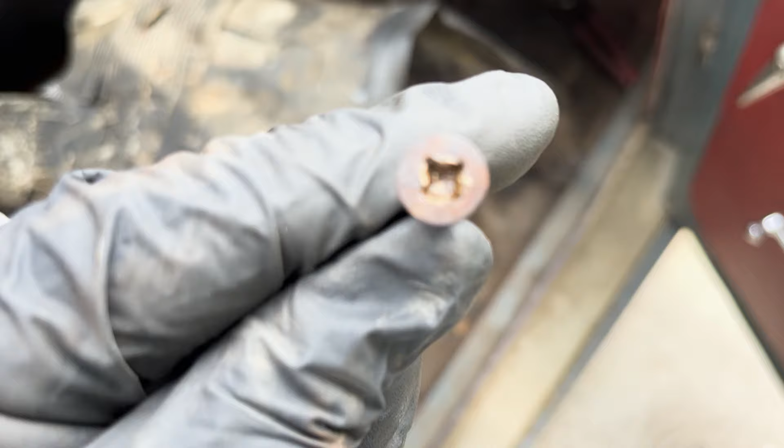Once the rubber flooring was up, that transmission cover is held on by brass screws. Somehow I managed to get all but one out without stripping the heads off. And the last one, I managed to fit a flat-headed screwdriver into the Phillips head.

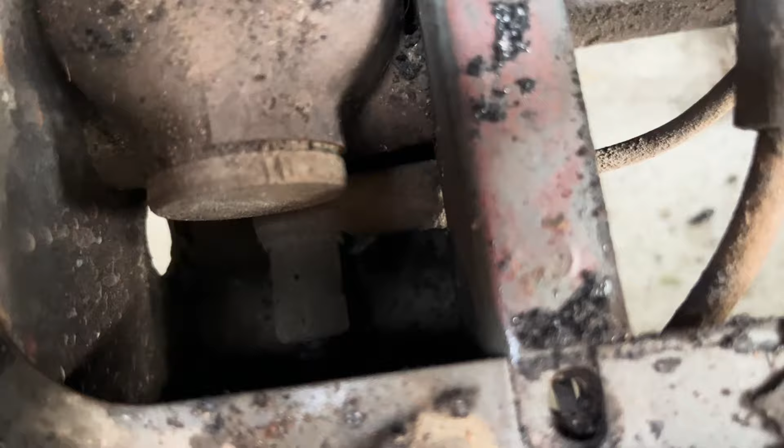The brake master, immediately obvious that it was going to be a bear to get this thing out. It's in the floor in this tiny little opening. The clevis pin and the spring and all the parts are just in there in ways that you can barely reach. Trying to get the brake master out, I moved the pedal and the clevis promptly broke. Of course, I don't have another one. Can't get another one. Certainly not easily. We're just going to have to make do.

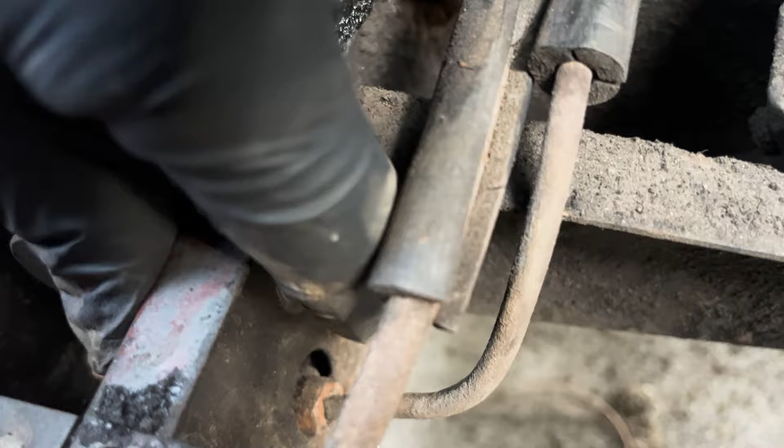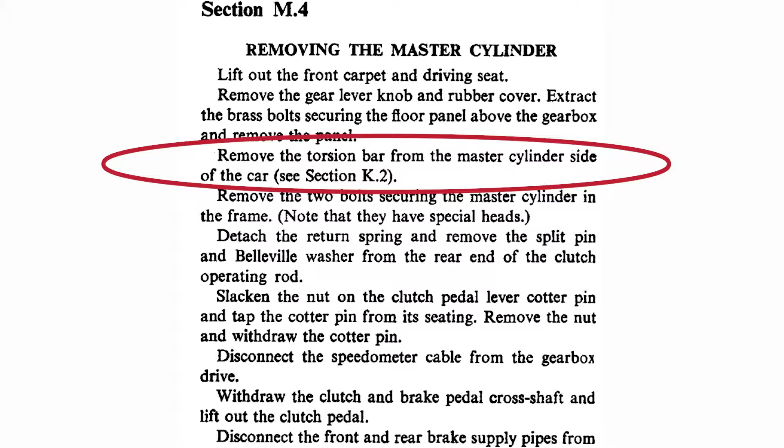But also, they have the nuts on this side. There's no easy way to remove this master cylinder. The bolts are held in by the torsion bar, and unless I disassemble the entire front suspension, there's no way I'm getting those bolts out. Having hit a roadblock, move on to the rear brakes.

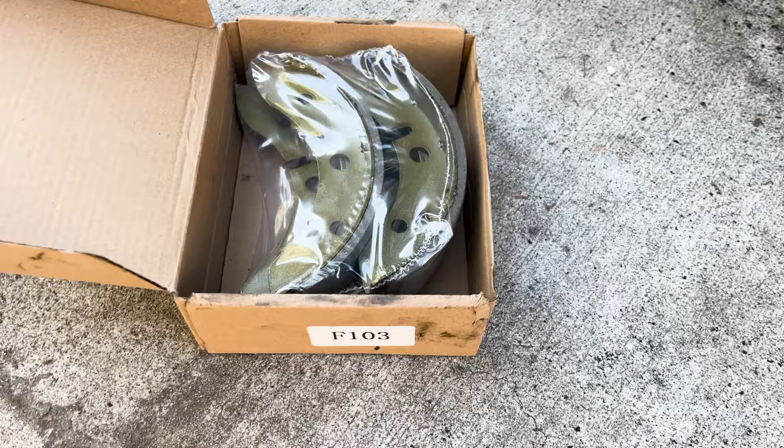We pulled the adjuster all the way off and found a fair amount of persuasion in the form of a large hammer. Eventually we're able to get the drum off, and I got my first look at a Morris Minor brake setup. When I had ordered parts in advance, there was definitely some confusion over different years of the Minor, but I had shoes, wheel cylinders, and such for all four corners of the car.

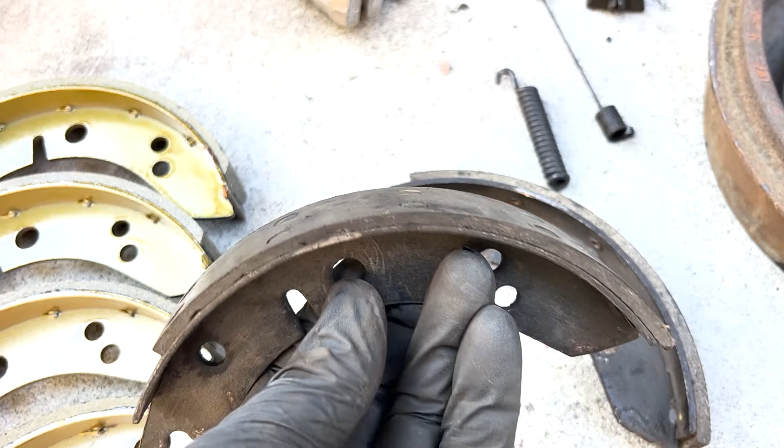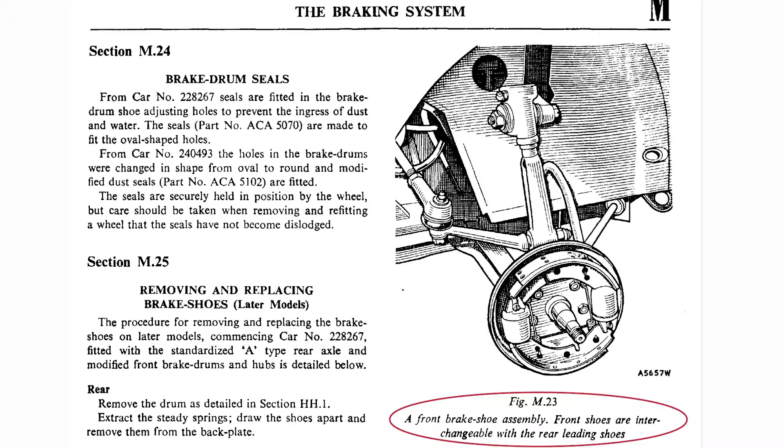And the shoes that I had ordered for replacements didn't match the ones that were on the car, and that left me scratching my head. Did I order the wrong shoes? Or were the wrong shoes fitted to the car back in the 60s? But eventually, by taking apart the front brakes, comparing all the new parts with all the old parts, and how everything went together, I was able to figure out. Turns out I had front brake shoes on the rear of the car, and that wasn't a problem.

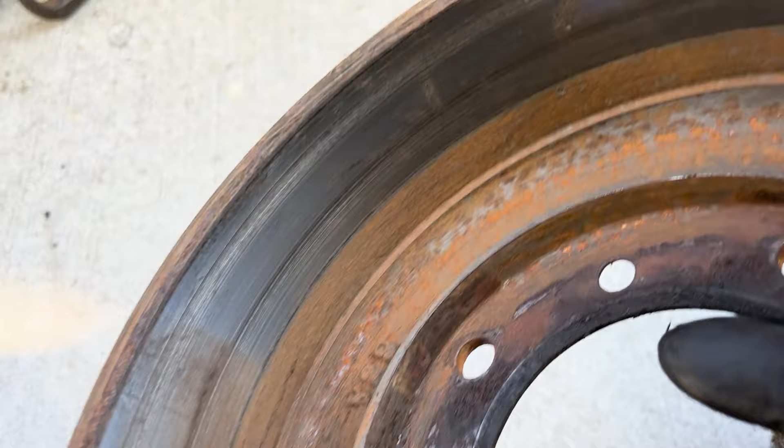As I took the drum off the front brakes, one of the things that was quite amusing was the friction material was paper thin. They had worn down into the brass rivets, and the brass rivets had marked up the inside of the drum. Added to the list of things that were going to need to be dealt with at a later date, generally when the car got home, going to need to look at those drums and see if we need to have them turned or replaced.

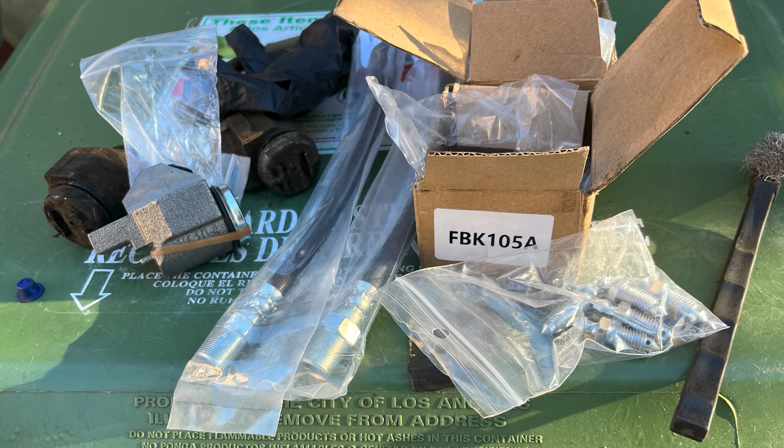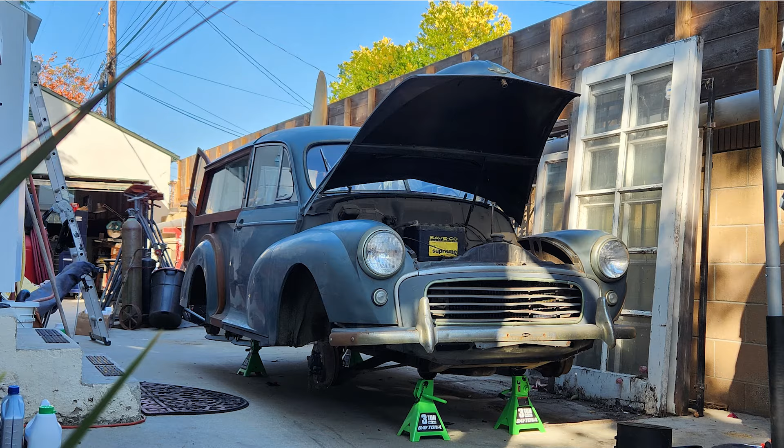Even after I'd spent, I don't know how much time looking at how everything went together, figuring the system out, and getting the parts I'd ordered with the right part of the car, somehow, after all that, I still managed to put the new shoes on backwards the first time around. So I had to take everything back apart and put it all back together. And then set everything aside so that tomorrow, hopefully, the replacement push rod for the brake master cylinder and the other parts come in on time.

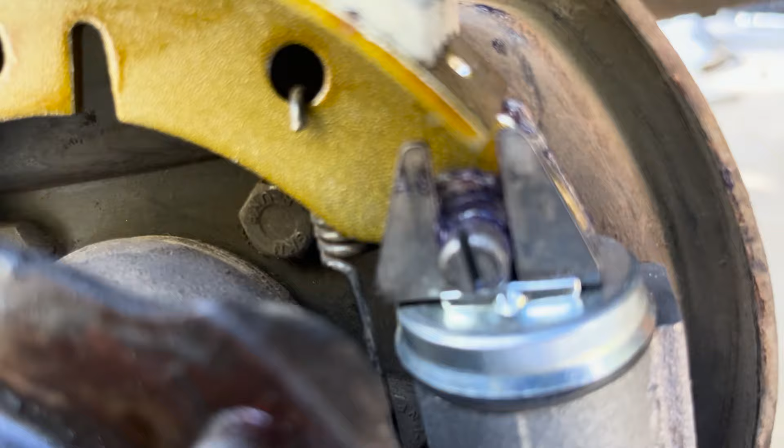We're already at day number 3, and thankfully I was able to get a nice early start. We had new flex hoses, new wheel cylinders, new shoes. I was able to clean the adjusters up, throw a little grease on them so they weren't entirely dry, and refit the hard lines. Everything was going together perfect until I went to fit the drum, and it won't go on. I think the friction material was simply too thick on the replacement parts. I don't know if you'd call it desperation or ingenuity, but I was able to sand the shoes down and get the drums to fit.

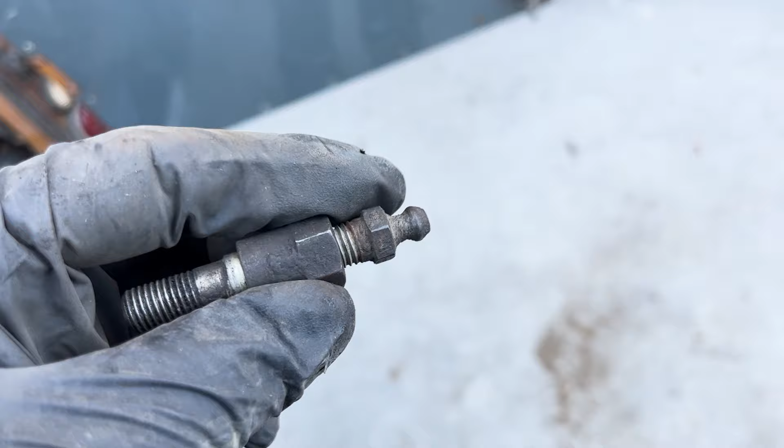We're spoiled by how many parts we can get for British cars and how easily, but oftentimes quality is a bit lacking. This time around, the bleeders that had been supplied didn't fit in the wheel cylinders, which had also been supplied by the same parts vendor. Luckily, I still had the old ones. They were still in good condition. I cleaned them up and they fit in there just perfect. So, problem solved.

Now that I've got the rear brakes taken care of and assembled, and the front brakes assembled, it's time to deal with the last piece, which is the brake master cylinder. So I started cutting the bolts, and they ate through the reciprocating blade almost immediately. I got about a quarter of the way through one. Well, running out of daylight again.

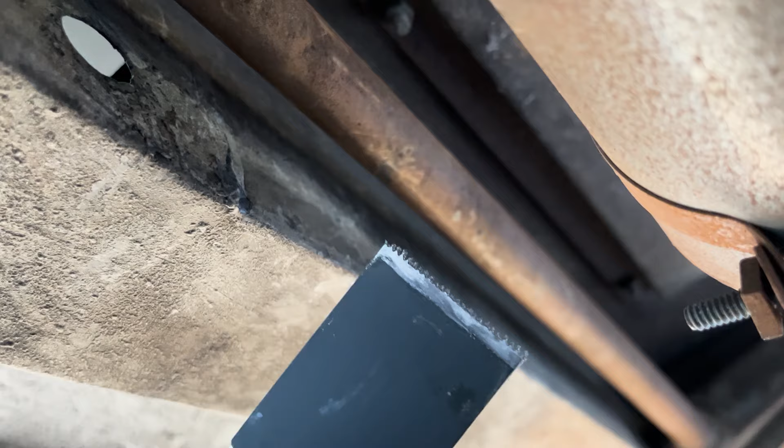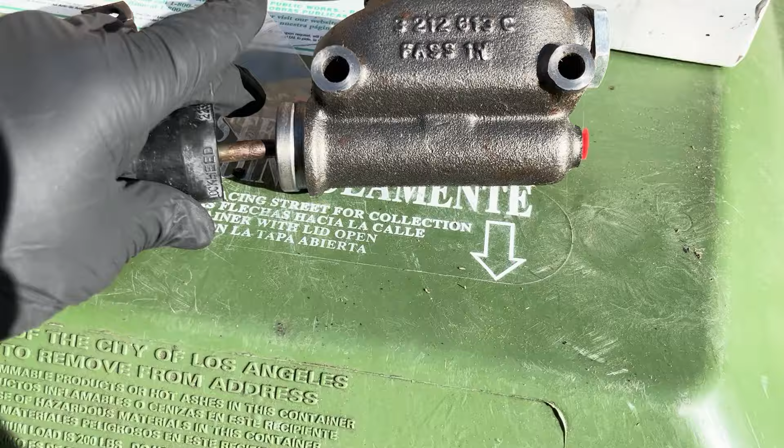The next morning, and holy cow, we have parts fresh in from the UK. Got a new clevis, a new actuator rod, the brake master cylinder, all the brake lines go back together, master cylinder gets slapped in. I have to say, I took the designer's name in vain multiple times, whoever designed the brake master cylinder and the method they used to install it, because it's just terrible how you have to reach that brake master cylinder.

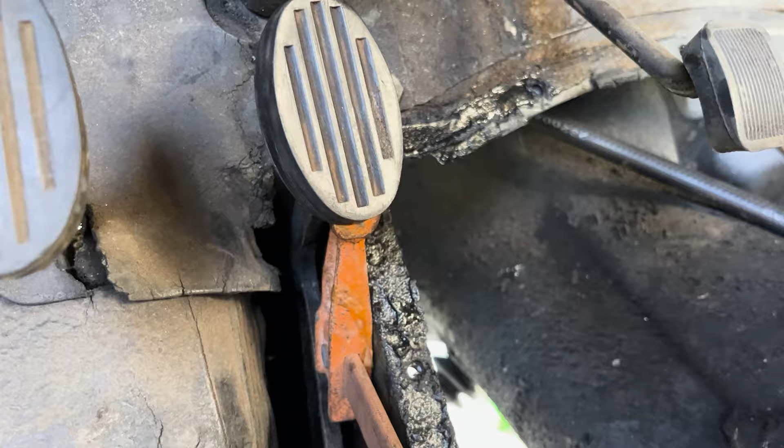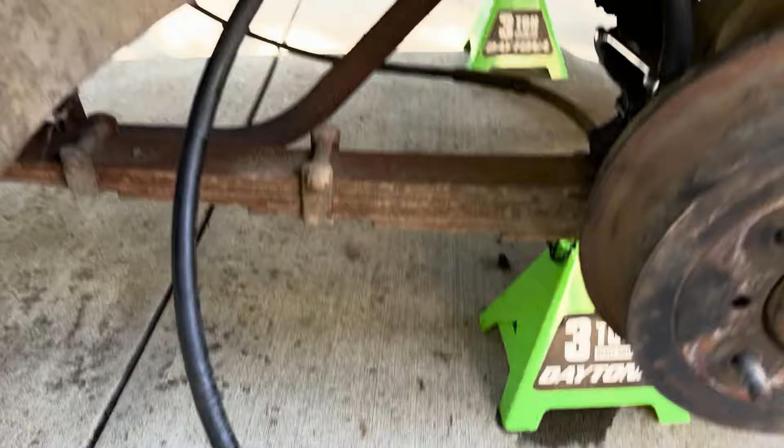Put everything back together, and I use my time-tested one-man brake bleeding trick of grabbing something and wedging it between the front of the front seat and the brake pedal after pumping it up, and managed to get the brakes bled, get a good nice pedal feel. Given that my time was up, I got on an airplane and went home and waited for the date of our California Highway Patrol inspection.